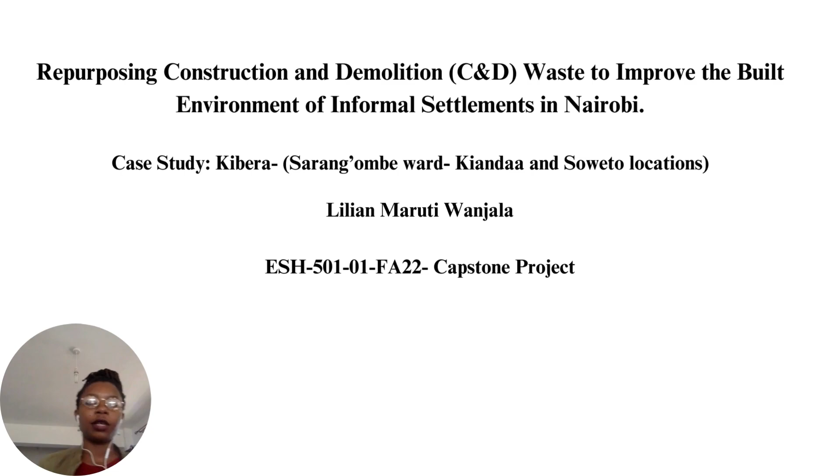Hi everyone, I'm Lilian Maruti Wanjala, and today I'm going to be presenting my capstone project on repurposing construction and demolition waste to improve the built environment of informal settlements in Nairobi. So this project basically investigates the feasibility of using recycled construction and demolition waste to improve housing and supporting infrastructure in low-income settlements with a specific focus on Kibera, which is the largest slum in Kenya, and it's in Nairobi.

So my conceptual idea came from the fact that safe and adequate housing is a fundamental human right, yet millions around the world lack access to it. Low-income settlements like Kibera in Kenya often face overcrowded and unsanitary conditions. Currently, there are many structures that are made from materials collected from landfills and construction sites, including iron sheets, scrap wood, plastics, and clay mud from neighboring rivers. These structures are not safe at all. They often offer little protection from wind, rain, and vermin entering the structure.

So the government decided to demolish them. But while demolishing these structures may seem like the best way to force people out of unsafe living conditions, there are social, political, economic and environmental challenges that come with this solution. At the same time, Nairobi is facing a growing waste management crisis. While the exact numbers are unknown, UN Habitat estimated that construction and demolition waste accounts for as much as 30% of the total waste in the landfill.

As this waste management challenge escalates, several illegal dump sites are springing up all over Nairobi, mostly adjacent to these low-income settlements, which further creates environmental degradation and health concerns for the communities living next to these sites. Currently, there are solutions that address these problems, but they address them in isolation. This is where my study comes in, because I saw an opportunity to address these two problems with one solution. This study meets the challenges by recognizing and appreciating that communities can play an important role in unlocking a transformative solution with benefits for the environment.

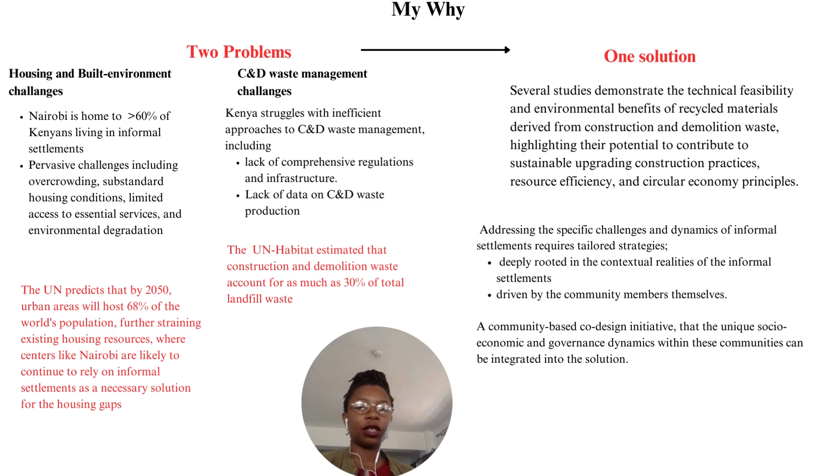The knock-on effect of this proposed approach is community empowerment through jobs, skill development, and establishing a circular economy model that addresses both housing and waste management challenges in other urban contexts. So it can be a prototype. This study embraced a social constructivist approach, recognizing the individual active construction of knowledge through lived experiences, aligned with peace engineering principles, with qualitative methods facilitating community dialogue on repurposing construction waste, prioritizing community ownership and co-design. This is why I chose this approach. The point is to engage stakeholders, to include residents, to capture diverse perspectives, and also inform a participatory action research approach.

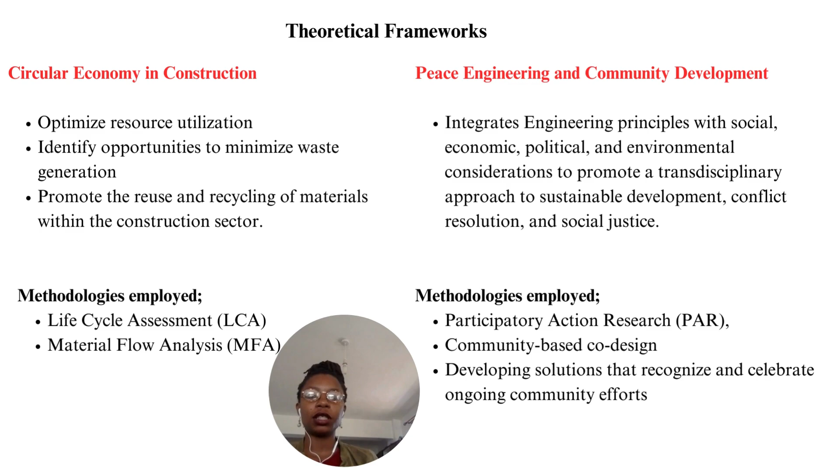The study employed two theoretical frameworks to maintain an ethical perspective: circular economy and peace engineering. Circular economy focuses on resource efficiency and waste reduction, aiming to minimize waste generation and promote material reuse, while peace engineering integrates engineering with social consideration, empowering communities and addressing socioeconomic inequalities. Methodologies like life cycle assessments and participatory action research guide the study towards sustainable development and community-driven solutions.

My journey began with stakeholder mapping, a crucial step in community-based projects. In exploring construction and demolition waste repurposing in Kibera, stakeholders range from community leaders to the residents themselves. The other category was industry representatives, and the third section was government officials. I segmented them into accessible, possible to access, and challenging to access groups, just to make my research easier. That helped me plan how I was going to approach them.

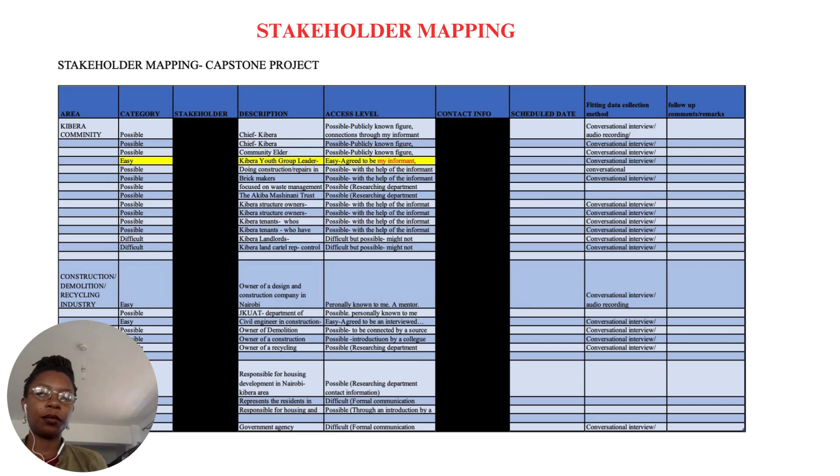As part of my interview preparation, there were several steps that I took. First, I obtained a research permit from NACOSTI, which is a body in Kenya that ensures ethical research practices. I navigated their regulatory framework and obtained official approval for the study. I also did research to gather information about each stakeholder in the stakeholder mapping to understand their roles, perspectives, and interests.

This actually helped me in understanding and founding an interview guide, which comprised of both open-ended questions and focused questions designed to elicit valuable insight from the interviewees. I refined my skills through practice sessions, ensuring clarity, conciseness, and respectfulness in the communication.

In parallel, I also came up with the informed consent forms, which outlined my study purpose, the voluntary nature of the participants, and the confidentiality of the responses. Then I also took proactive steps to secure interview appointments by reaching out to the potential interviewees for the study. This actually helped my study go way faster.

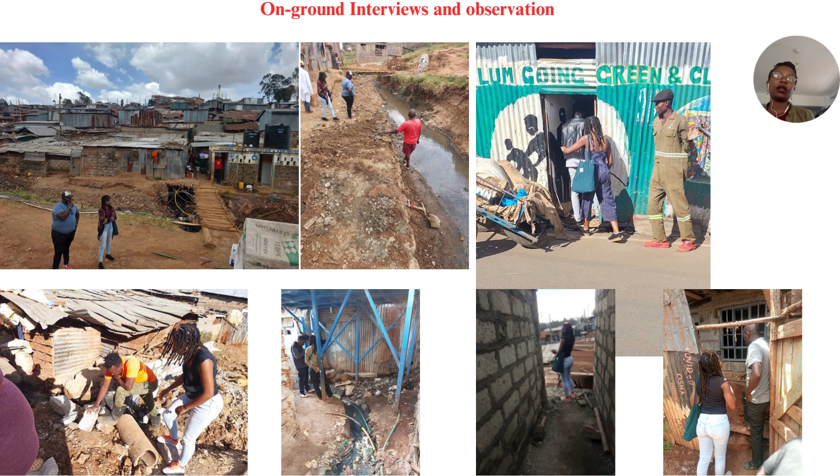So first I conducted on-ground interviews and observations. I walked around the Kibera location and did a lot of interviews with different people from the community. From these conversations I got their experiences, their insights, their challenges, their strengths.

After doing the individual interviews, I had a focus group discussion. This was just to get collective insights, to make all these interviewees meet and interact and talk to each other, and also to explore the specific themes that I identified in the individual interviews.

Next, I held a participatory co-design workshop, and here we're just discussing everything to do with the challenges that we're facing, and construction and demolition waste. So we're designing potential solutions by improving their built environment using construction and demolition waste. This was also to encourage ownership and community participation in the research process.

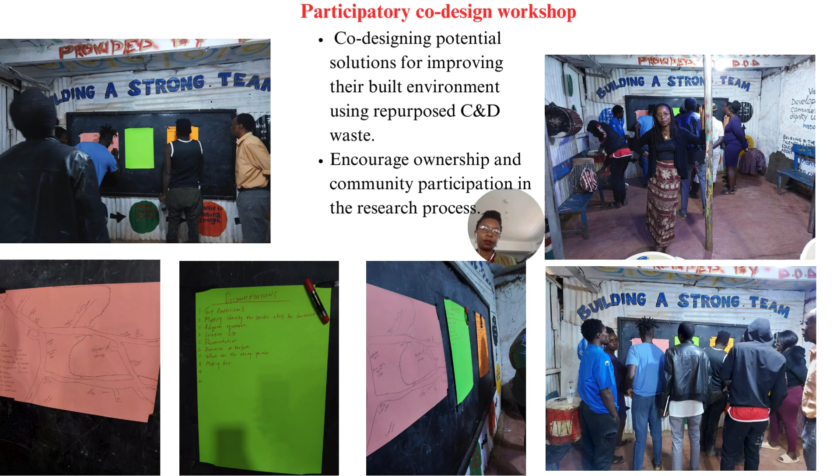In the workshop, we also did participatory community mapping. This was just to identify and indicate the crucial landmarks in the community, which the community identified. We identified the specific needs and improvements required in the built environment, and how we can use construction and demolition waste, what kind of waste they needed for that environment.

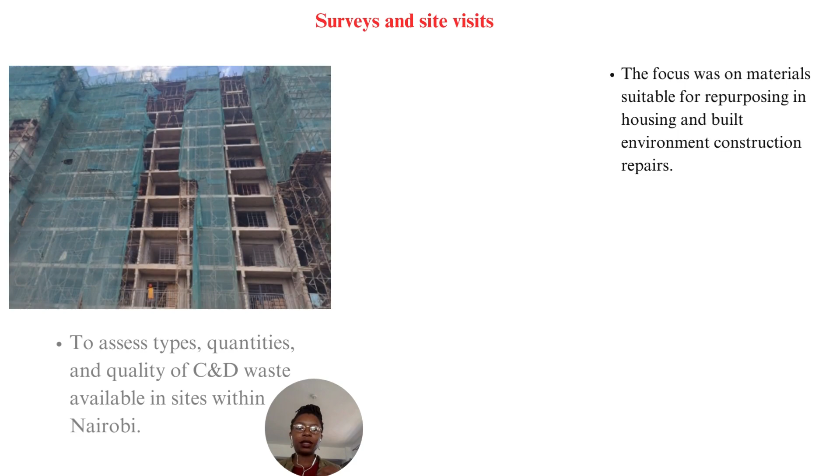After having these discussions, of course, I had to go back to the site and do a focused study to ensure that the materials that had been identified in the community would be available in the sites to make it as feasible as possible. So the focus was on materials suitable for repurposing in housing and the built environment. And also I wanted to know the types, the quantities, and the quality of these materials within the sites in Nairobi.

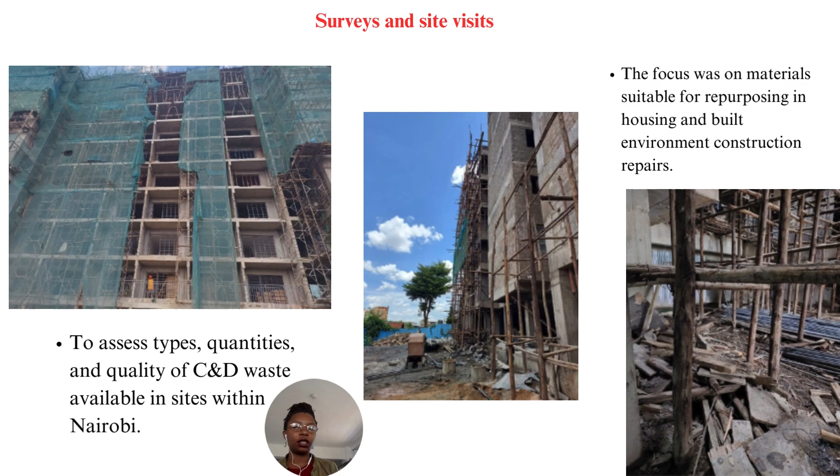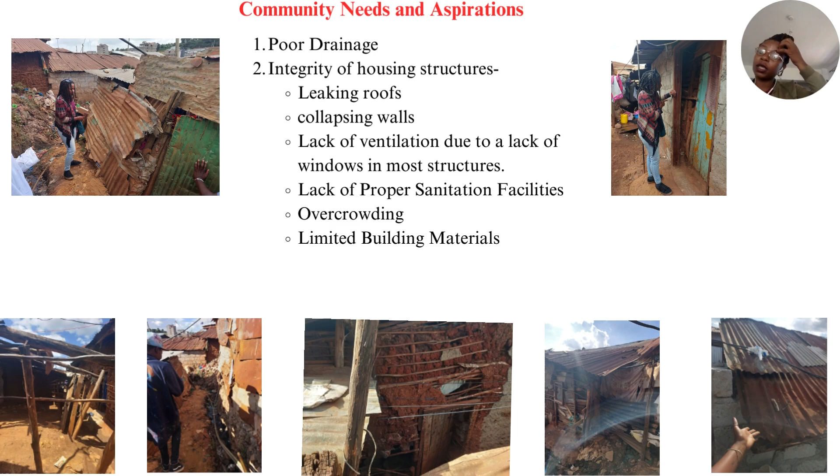So on to my findings, the study uncovered that there were critical needs within the Kibera built environment, including poor drainage, structural integrity issues like the ones listed below, and also sanitation facilities were limited, and there's also limited building materials.

Despite these challenges, the community has showcased remarkable resourcefulness through repurposing construction and demolition waste for infrastructure improvement. So this is already happening. They're already using construction and demolition waste. So this is an example of a drainage that was built using construction and demolition waste.

A resident went, collected construction debris, mixed it with cement, cleared the place that was notorious for flooding, and cast a whole drainage system that has actually helped with the flooding and the waste management in that area.

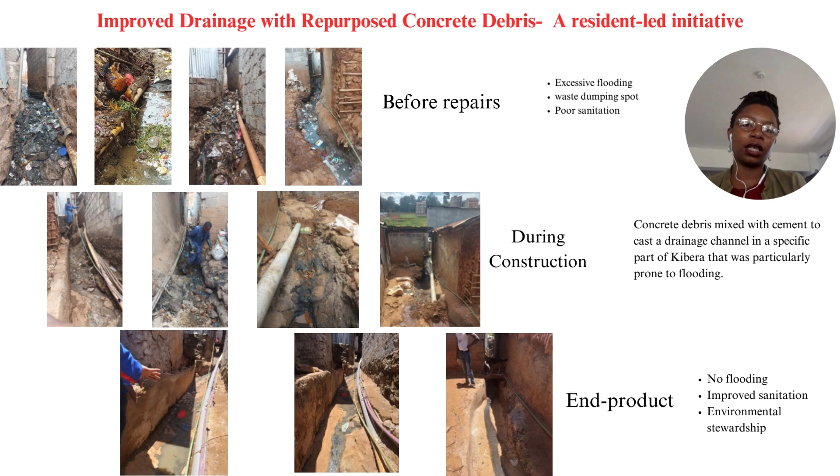A second example is a drainage in a different location of Kibera, also notorious for flooding. Before it was like a dumping site, but then this resident got the youth and the children together, and they did a collection of construction and demolition waste, which they used to build this drainage system.

So in doing so, it became a community-driven initiative by the youth and children and adults, of course, the people in construction, and this really helped the drainage in that area. So right now, they do not experience flooding in that area.

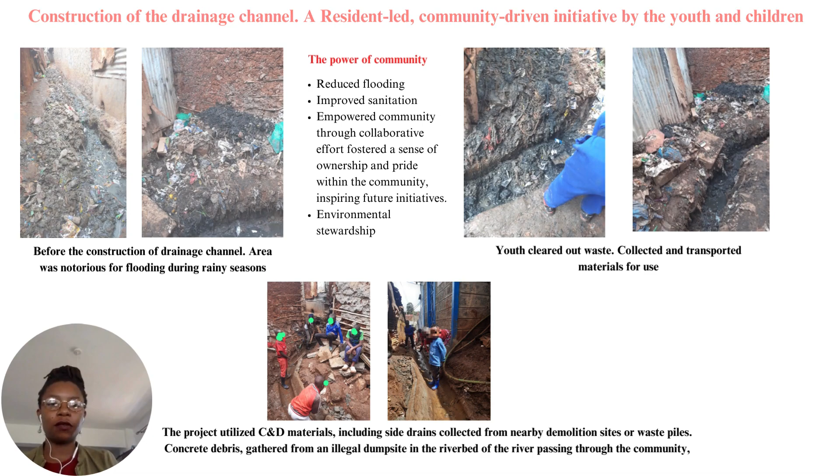So there are several other examples. If you walk around the community, there's so many examples of people using construction and demolition waste to improve the built environment, but I'll do one last. This is a final example. It is a community hall, a resident-led initiative.

One resident who's also a construction worker collected the construction and demolition waste from various sites and second-hand yards. These included stones, construction debris, steel members, roofing sheets, wire mesh. He used this to construct a whole hall. This hall is supposed to be used for playing indoor games by the community.

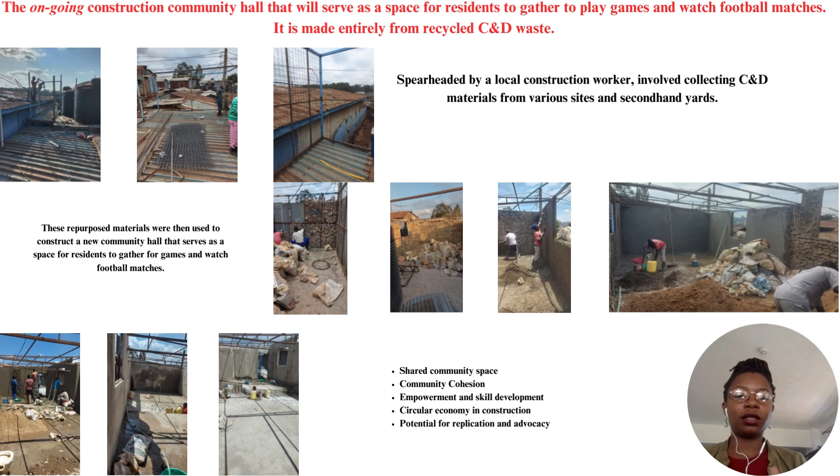It's supposed to be there for everyone to access. And also it's a place where they would put TVs and watch football matches, because the community doesn't have such a shared space. So as a result, they came up with a shared space. It's already ongoing. The only thing left is the roofing sheets, which they're still collecting. So it's an ongoing development that shows the potential of circular economy in construction.

I also did an analysis of construction and demolition waste, which is a characterization to just see the amount and the type of construction waste that was collected. We saw these people indeed collect a lot of construction and demolition waste and store them so that they can keep them to do projects.

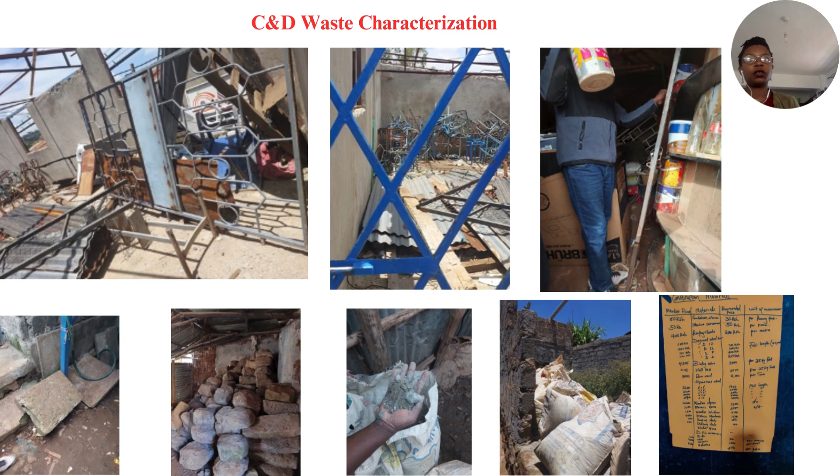By leveraging existing resources and minimizing waste generation, Kibera residents can significantly reduce construction and demolition waste costs while improving their environmental sustainability. However, the challenge here is they lack transportation, and also there's storage. They don't have enough storage for these materials, and also they cannot afford to get the materials as much as they want because of the cost of the materials.

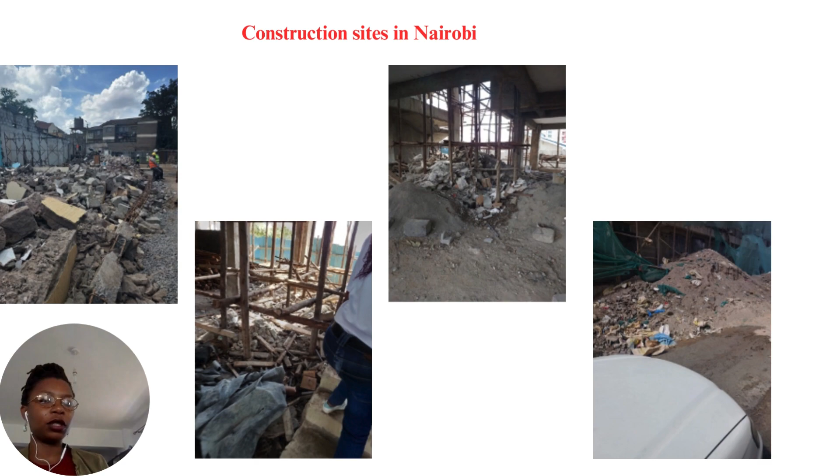Now, parallel to that, I went to the sites and identified the amount of materials that are there on site, which I just wanted to compare with the things that are being collected in Kibera, and we saw that the materials are exactly the same as those available in the sites, and the only difference is the quantities. Well, I can't tell you the exact quantities of the materials on sites. There are definitely a lot more than the ones found in Kibera, and that actually proved the point that the residents say they do not have a way of transporting or storing these materials, or they cannot collect as much as they would want to because of the financial challenges.

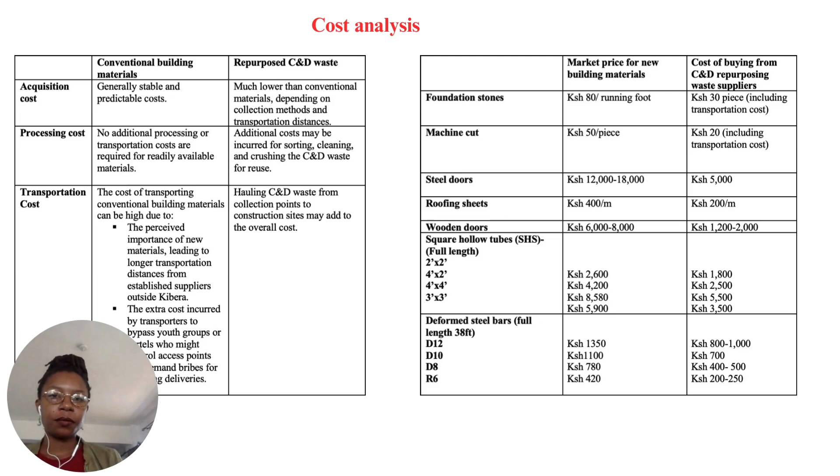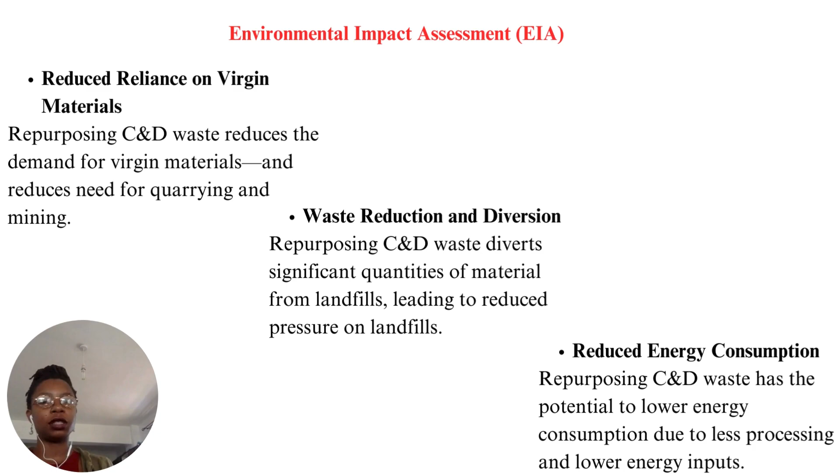So, in conclusion, the transformative potential of repurposed construction and demolition waste obviously extends beyond infrastructure development. It also shows the social, economic, and environmental benefits. So, if we could embrace innovation, collaboration, and community empowerment, Nairobi's landscape would evolve to a more sustainable and resilient future. While this study provides valuable insights, several limitations and opportunities for future research remain.

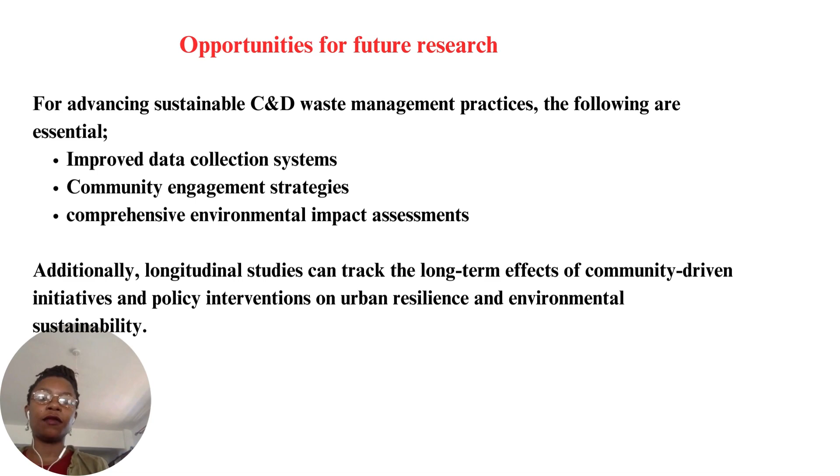So improved data collection systems, community engagement strategies, and comprehensive environmental impact assessments are essential for advancing sustainable construction and demolition waste management practices. Additionally, there should be longitudinal studies to track the long-term effects of community-driven initiatives like this and others, and policy intervention on urban resilience and, of course, environmental sustainability.

So building on the promising results from my feasibility studies, I'm excited to announce that the next steps will be developing a proposal for a pilot project in Kibera. This proposal will seek funding to explore the use of recycled construction and demolition waste to improve housing and the built environment in this community. So fingers crossed, all the best.